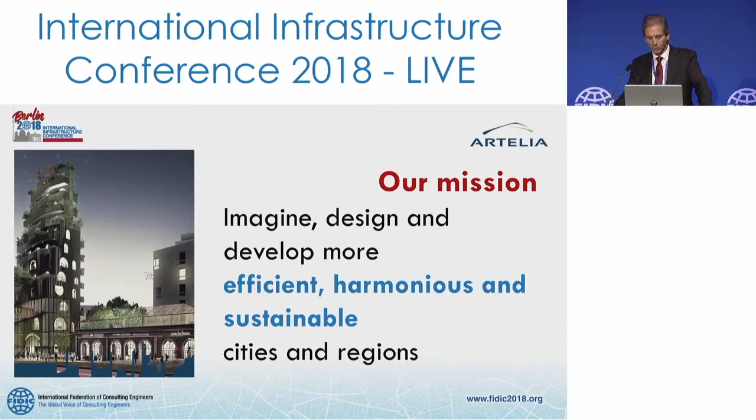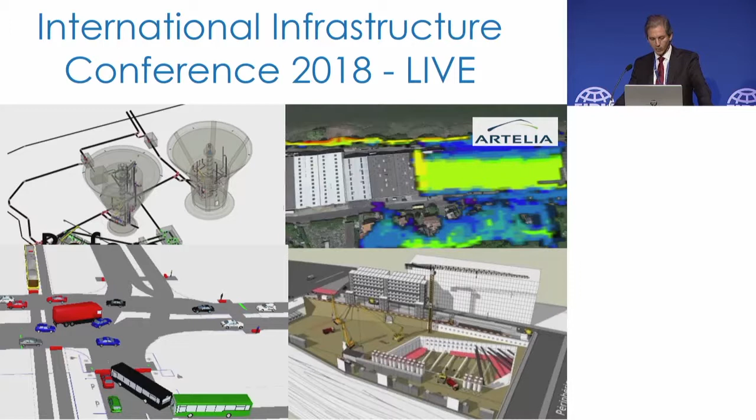And we can model very complex systems, far quicker than we ever could in the past. We can run many scenarios, because things that used to take 2-3 days to run now take a few seconds. And we can also have models that are more and more accurate, because they are fed with more and more data.

In fact, our modeling is a combination of mathematical models and the input of statistics. And we can also model at very different scales, from very small to very large.

Basically, we tried to articulate all the available data that we could gather—gather the data, put it together, bring intelligence to this data, and especially categorize it to make it easy to understand, easy to use, easy to express to elected officials. Because the ultimate goal was to help the mayor of Santiago de Chile craft a sustainable development policy for her town, as well as an action plan subsequently.

We also were able to compare that data with what we experienced, for example, in Paris. It ranges from air quality to sun exposure to accessibility and so on. What we found out is that in Santiago de Chile, the circular economy is already very much in place compared to many other cities, whereas the main issues they're facing are traffic and continuity within the city.

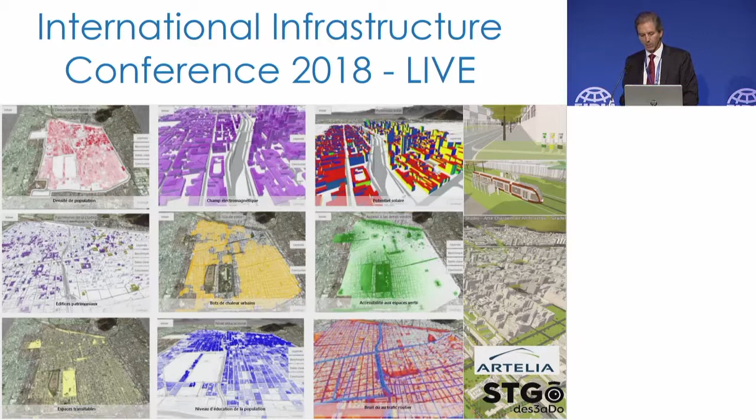And this is also why we need more than ever to invest in our people. When I say invest in our people, it's also because after the simulator in Santiago de Chile, we decided with our partners to create a cluster. It's a completely different approach—not just about the data, it's also about the people. It's about putting people together to think, to develop, to create a smarter way of working together.

So private companies as well as the municipality, we teamed up with a test municipality around the northern part of Paris. It's actually the location where the 2024 Olympic Games will be hosted, with a stadium and a swimming pool. And what we put together is all these partners - now we have 100 partners that have gathered together, and we bring our intelligence, our innovations, our disruptive ideas together.

Together to question the traditional value chain of our infrastructure, but also to test some new uses, new technologies. For example, we are working on a possible 3D pathway. We're working on anti-noise walls that could produce energy. So there are numbers of ideas like that, trying to select, decant, and categorize, so that we can develop from the experimentation, from a bottom-up approach, a sustainable development policy for that area.

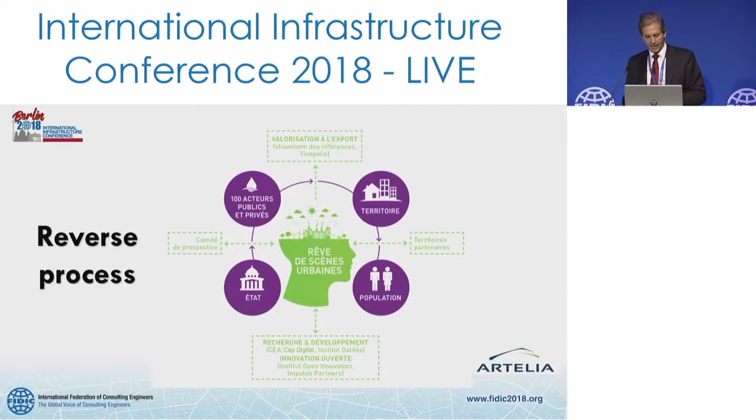And I would like to now dedicate the last few minutes of my speech to narrow down to a smaller scale, a far smaller scale, and mobility, which is one of the red lines of our conference. As a starting point, I would like to share with you - I suggest that we watch this one-minute movie that was shot by an Argentinian artist who is very much involved in looking at the transformation of cities. I suggest we watch that and then comment on it.

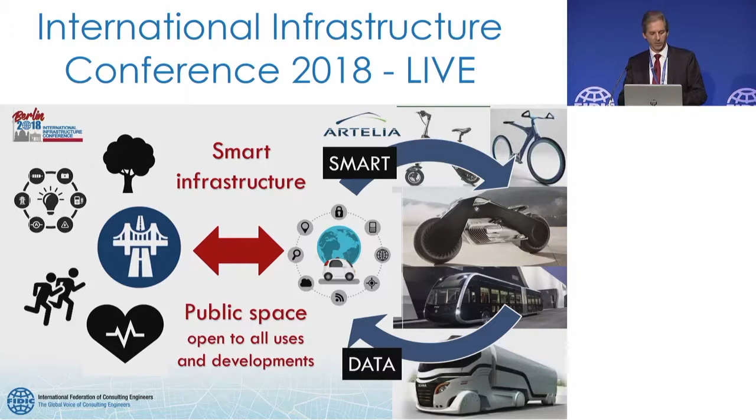But this is exactly what you have here on this slide - the smart is through the interaction between the infrastructure itself and all the vehicles that are equipped with sensors and all types of devices. But this model is also hit by some new competitors, new entrants into the system, and shaken by these new autonomous offers where the infrastructure is not really involved. It's just about the equipment, about the vehicles. And we also see this through Waze, that we all know for our vehicles.

We also experience this very similar thing in Paris, because with regards to renting bicycles, we have been overwhelmed over the past few months by new offers, by bike renters bringing GPS-equipped bicycles that you can identify and locate with your cell phone. You can rent, then drop them anywhere you want. But these systems, they are not as secure - they are far more flexible, but not as secure as the first ones. And sometimes they have some strange behaviors.

For example, we were hit by a heavy snow event last winter in Paris, and Waze was directing people to all the empty streets. But the streets were empty because there was a lot of snow, so you couldn't drive. So it shows that, of course, things are evolving and going towards more and more independent systems from the infrastructure. But we are still not completely there right now. My last thought, my last bet, is that these security issues, these legal issues, these fine-tuning issues, they will be solved one day or another.

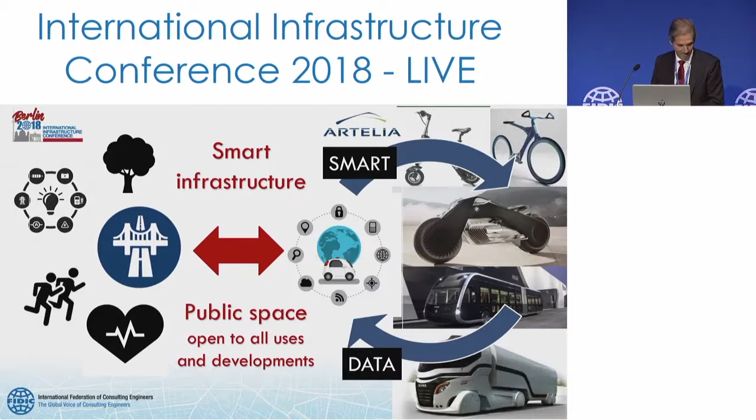Thank you. Yes, that's me.

Thank you, Gavin, for the introduction. My name is Thomas Birtel. I'm coming from Vienna, being the CEO of Strabag. And some of you who know the company might ask yourselves, are they not a contracting company, or are they an engineering company? It's true, out of our 73,000 employees, about 20,000 are engineers and technicians, but they are mainly devoted to the contracting business, to the construction business. But notwithstanding that, we do have two engineering departments: one devoted to construction and civil engineering of about 1,000 engineers, and another specialized in the road infrastructure business, also amounting to about 1,000 engineers. Hence, I feel deeply honored to be invited today. I think it's the first time my company is delivering a contribution to the FIDIC conference, and I hope I can respond to the expectations.

Stemming from the contracting business, we have two features in mind once we hold our presentations. The one is keep it simple, and the other is keep it colorful and a little bit hands-on. I'll try to do that myself, although the subject is a big one. Smart cities of tomorrow is a very wide subject, and I've just 10 to 15 minutes left to give our view on that subject. I'll try my very best.

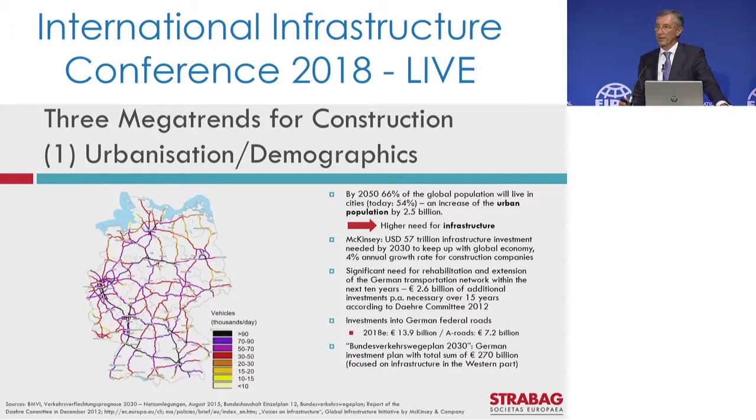In the European Union we have a climate and energy framework which sets three targets until 2030: at least 40% cuts on greenhouse gases, at least 27% share of renewable energy, and at least 27% improvement in energy efficiency, which is a huge challenge.

We have to keep in mind that it is not road traffic producing the majority of greenhouse gases in the world today—it is buildings. They account for the largest share, not only in the EU but on a global level, of final energy consumption, producing about 35% of all greenhouse gas emissions. Traffic is just 25 to 30%.

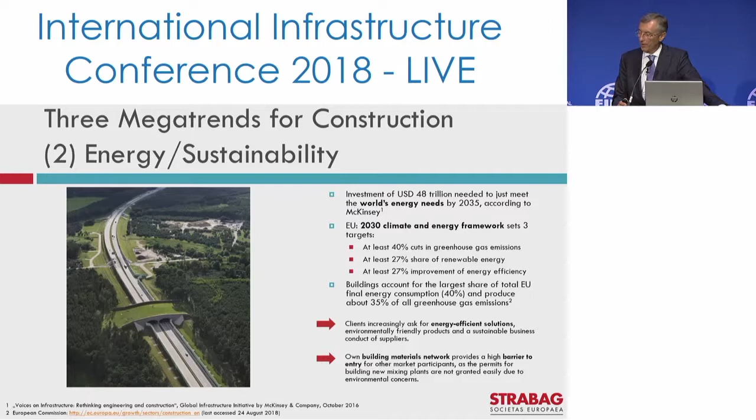This gives us, of course, business opportunities. Our clients are more and more asking for energy efficient solutions, for energy efficient buildings. And being also a raw materials group, we see that our own building materials network provides a sort of barrier to entry for new competitors, because nowadays it's very difficult, in light of the above-mentioned situation, to get new permits for new mixing plants for asphalt and concrete, or to open new gravel pits or quarries.

Third megatrend, and we have heard a lot of that today already, is digitalization. To give you a picture focused on the construction industry, in the first line we have shown the productivity gains in the construction industry, the producing industry, and the manufacturing industry for the last 10 years since 2008. Construction has a plus of 4% only, the producing industry 27%, and manufacturing industry has a 34% productivity gain.

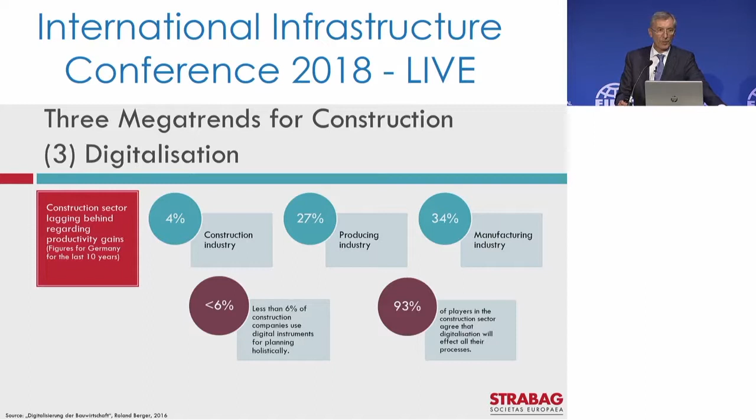The lagging behind of the construction industry is evident. The second row gives two obviously contradictory opinions in our industry regarding the importance of digitalization. Less than 6% of construction companies, at least in Germany, use digital instruments for planning holistically. Of course, many of them use a lot of tools separately, but a holistic digital approach in our industry is the exception. On the other hand, 93% of the players in our industry in this country believe that digitalization will affect all their processes, and the contradiction is obvious.

Strabag is a company with about 15 billion in annual output, very much focused on Europe. We produce more than 90% of our output in Europe, and that's why I underpinned the importance of those megatrends also in the old markets. On the other hand, we have strongholds in the Middle East, in Africa, and in Southern America, which means we are also very vigilant regarding the development of the megatrends in those parts of the world.

To fulfill my promise that I would give a hands-on presentation on the subject, I would like to give some very practical examples which we can currently show in our company. Two of them will be from our research and development department, and two of them will be construction projects. Two of them dealing with sustainability, and two of them coping with the challenges of the urbanization trend which I described before.

The first one comes from our research and development department here in Germany. Particulate matter is a big subject in this country, especially in some major cities. We are right now testing with some partners a sort of modular moss-covered noise absorption wall, which shall be capable of binding particulate matter and hence help reduce pollution via nitrogen oxides. This is something which will be running at least until the middle of 2020. The first findings are challenging, but we are continuing to work on that.

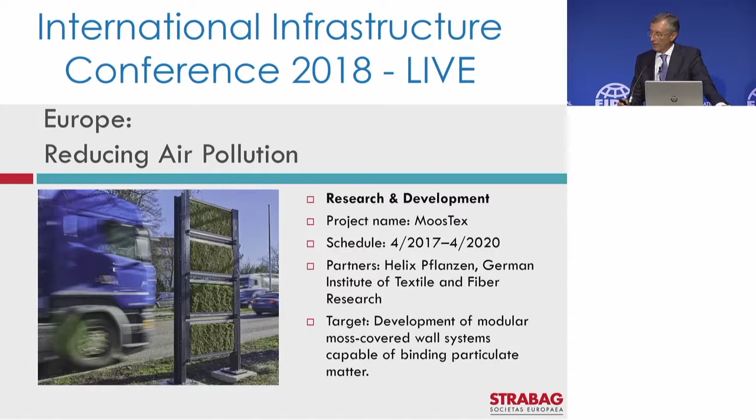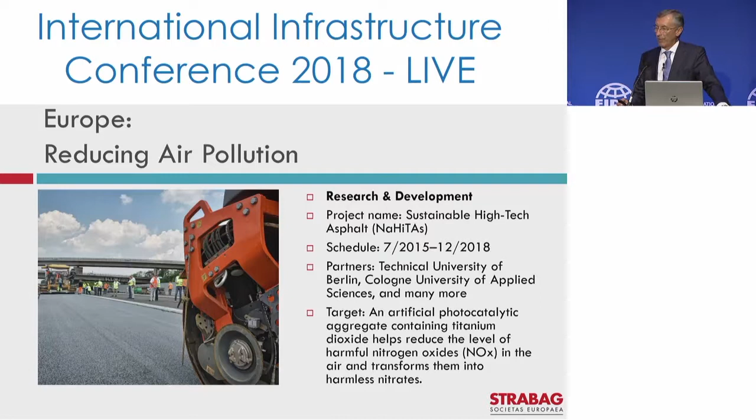The second project I wanted to present is what we call in German Nahitas, translated as sustainable high-tech asphalt, a pavement recipe for roads. We do that together with the Technical University here in Berlin and with Cologne University. The target is to develop an artificial photocatalytic aggregate serving as pavement for streets, which contains titanium dioxide and helps reduce the level of harmful nitrogen oxides in the air, transforming them into harmless nitrates - another way of reducing pollution in overcrowded cities.

The third example is a construction project. When we talk about the megatrend of urbanization and demographics, we feel we can define at least four subtrends. The major challenges urbanization entails are the establishment of an environmentally friendly, sustainable infrastructure; the establishment of efficient waste treatment systems; water distribution and wastewater collection systems; and a fourth one - it's out of my mind right now, I'll come back to that later.

This deals with the first element I mentioned. We have built a bus rapid transport system in Tanzania, in the city of Dar es Salaam, which operates buses on dedicated thoroughfares and hence increases the attractiveness of this public transport means. One problem of our current and future traffic situation is that individual transport is far privileged and above public transport in the acceptance of the population, and this is one attempt to increase the attractiveness of public transport in Dar es Salaam.

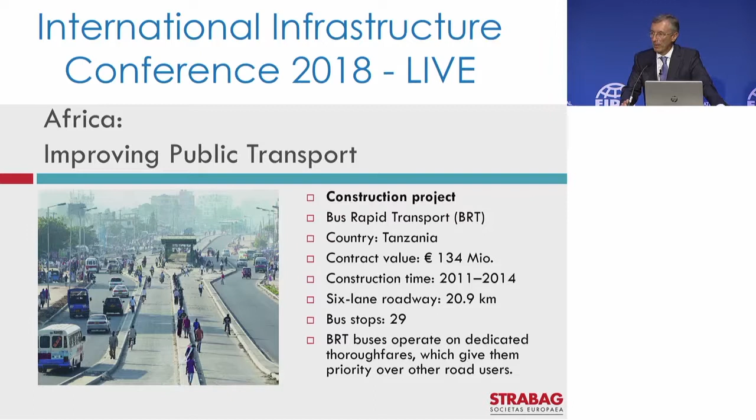The second construction project deals with the waste treatment problem I mentioned as a subtrend to urbanization. This is a new sewer network in the city of Singapore in Asia, which we built from 2015 to 2017, and it had to be built in a densely populated area. Singapore is not a new city, it's a highly populated existing city. We applied the construction method of pipe jacking, laying concrete or steel pipes non-disruptively, especially suited for installations with relatively small diameters, making it possible to establish such a new system in a highly populated city.

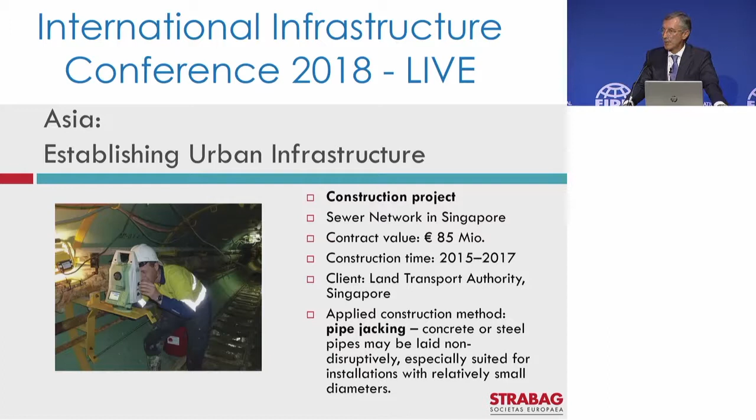So these are four very concrete examples from our practice. Some are still ongoing, others are already in the past, and I hope that gave you a practical picture of how we are tackling the challenge to contribute something to develop smart cities in the future. Thank you very much for your attention.

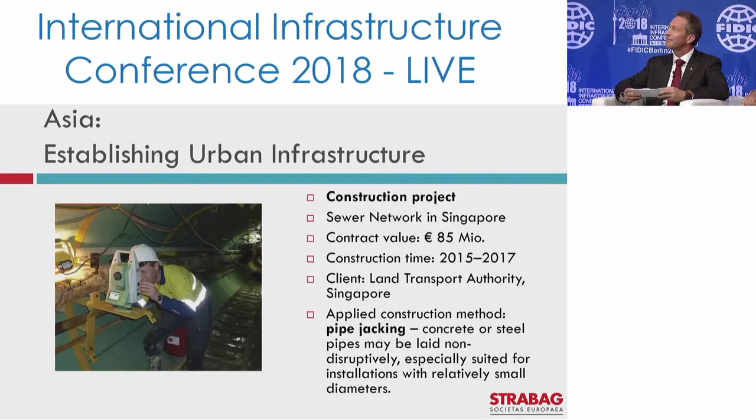Thank you for that, Thomas, spot on, well done, great timing. So Alexander Jan from Arup, he's the Director for City Economics, just appointed fairly recently. Up to Chief Economist is the latest appointment. So two economists on the platform at least, which is good.

Is it that way? Okay, good afternoon everybody, I'm delighted to be here.

Having seen the run-through of artificial intelligence and various other technologies, I wish we could apply it to dealing with some of the challenges facing Britain back at home at the moment. Perhaps they can apply it to solve you-know-what.

I'm going to run through a couple of things. I'm conscious that the next session is about financing and funding, and we've covered a lot today on mega trends like urbanisation. I want to draw out the extent to which technological phenomena affecting demand for transport, from a consumer point of view rather than the supply side inputs discussed today, might have implications for major schemes, notwithstanding the urbanisation already talked about, and the implications for investment and for how we fund and design new projects.

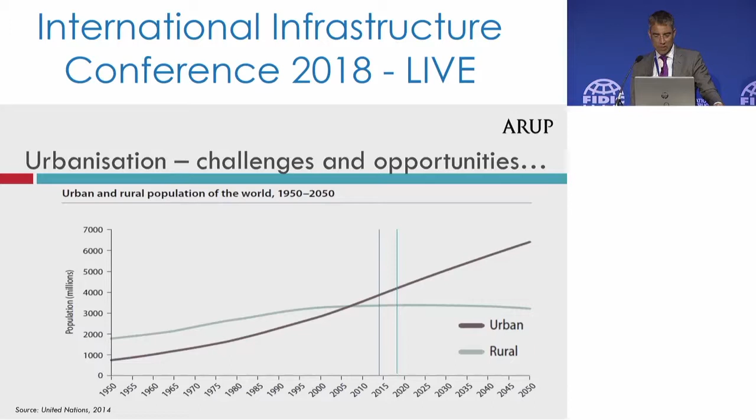These are charts from the United Nations showing the trend other speakers have already highlighted: this hurtling towards urbanisation, with so much of the population living in cities within our lifetimes. You can see, as Gavin mentioned, the importance of megacities, projected to reach 41 by 2030.

It's worth noting there's a bit of a hockey stick curve for megacities. The more densely populated and larger they are, often the more interventions they need to keep them going. The day-in, day-out stress that infrastructure experiences in these teeming cities means they need more public sector interaction and interventions to maintain the quality of services and environment they're designed to provide.

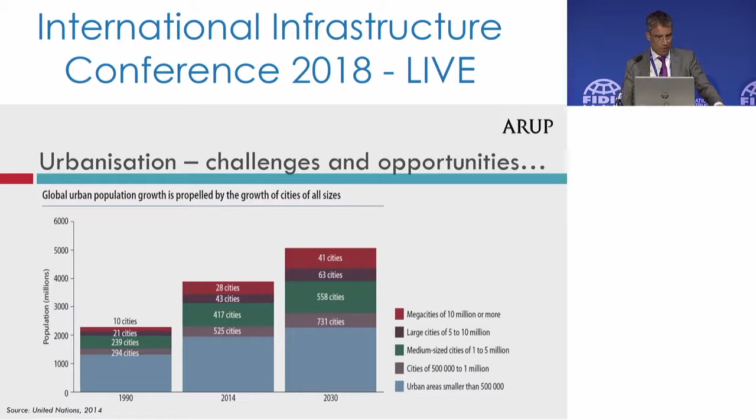If you look at what's going on with projections for cities in the Far East and East Asia, you can see enormous increases in population across the region, in Malaysia and other states.

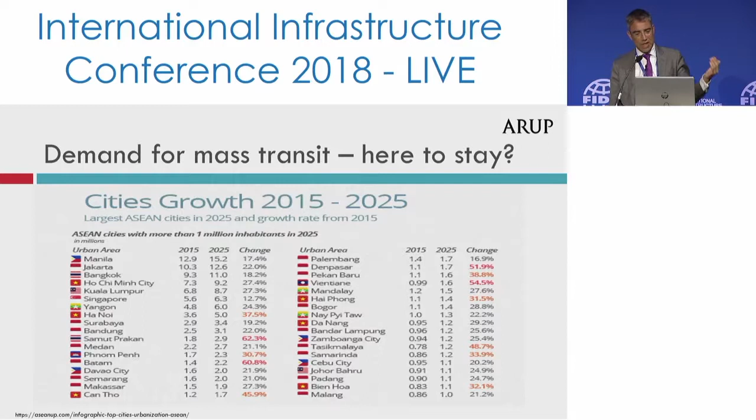In order to build them, they need capital. That capital is not necessarily scarce - we all hear about this wall of capital, with pensions apparently going to be invested in these things. But it does mean there is competition out there for the funds required to facilitate the borrowing or other mechanisms to build these schemes.

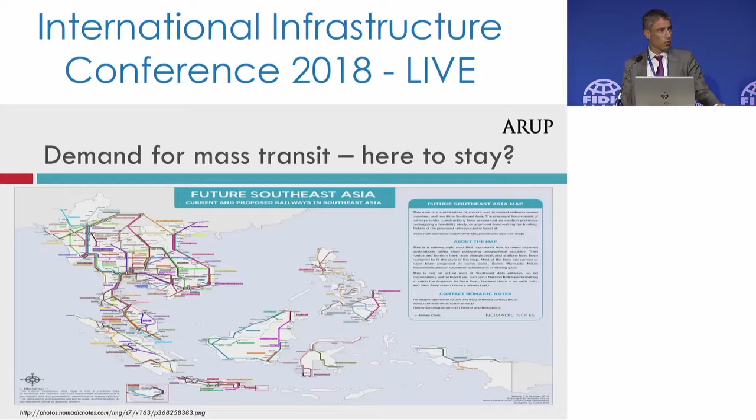And that's just in metro lines and railways. As previous speakers have identified, there's also huge demand for investment in water and waste, renewables, energy and so forth. In that context, and thinking about the technological arguments that are the key theme of today's conference, I think it's worth pausing to reflect on what's been going on in the rail market.

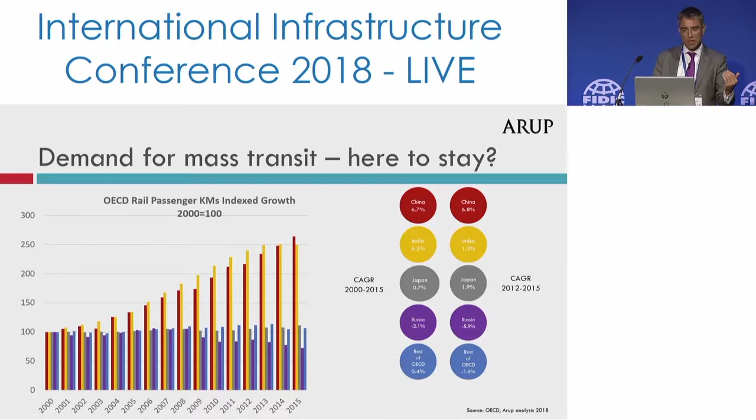This slide shows that for OECD countries, there's been a bit of a softening in rail passenger demand in certain parts of the world over the last 15 or so years. While China has continued to grow relatively strongly, other parts of the world, including Russia, the rest of the OECD, and rates of growth in Japan and elsewhere have tended to be on the low side or softening. That's reflected in the case of the United States.

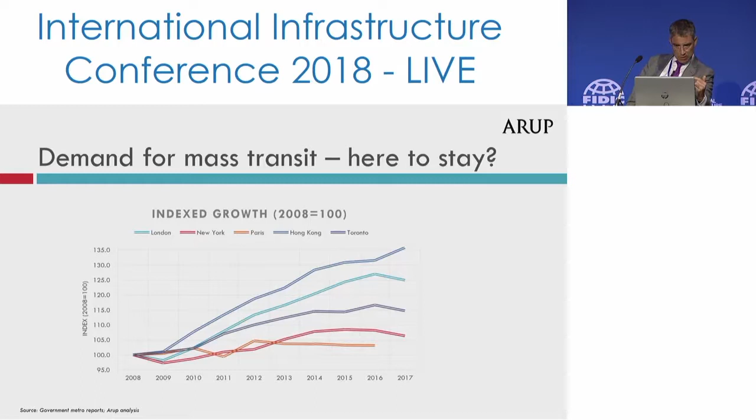This shows, with Paris at the bottom of the scale, then New York, Toronto, London, and Hong Kong, that there's some sort of change going on in the market for city-based systems, perhaps less so on the intercity side, but there is something going on. The ever-increasing use of metro systems we've experienced in the last 10 or more years appears to be softening and potentially changing.

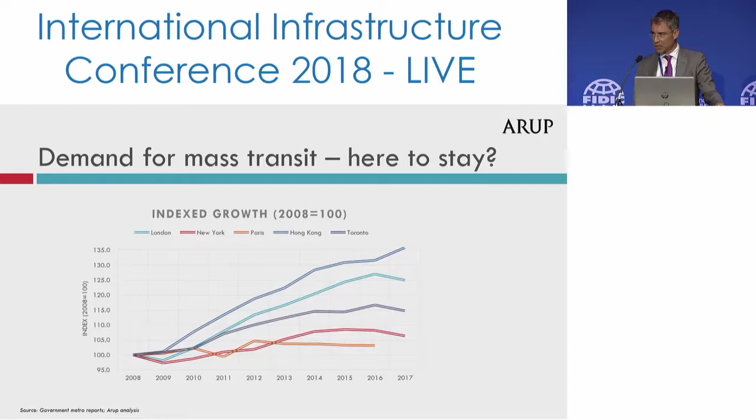We've been doing some work in the UK looking at the same phenomena. What I really wanted to show you is this green line on the right-hand side, which is the demand profile for London and South East commuters. It's a very large commuting area that's experienced considerable growth for many years. London's population, despite the headwinds and uncertainty of Brexit, is still growing by between 70 and 100,000 people a year. Employment is still strong, the economy is growing, and yet we're seeing this fall-off in commuter demand, as well as some off-peak softening.

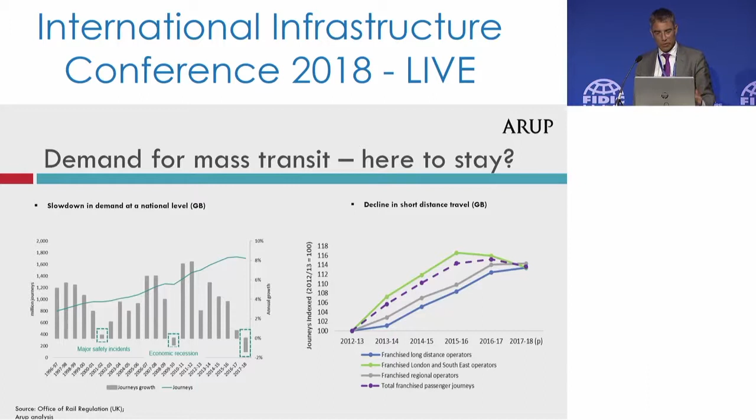I think, for lots of reasons, we need to be trying to understand these trends and the sort of responses that are going to be required.

I think what's interesting is that we can build scenarios, this is a UK context, but I think it has read across to other parts of the world, where we can try to tease out how some of these trends might well affect the level of demand for our systems going forward.

In the UK, what we've seen is an interesting effect where there seems to be a decoupling from people buying season tickets. Historically in the rail market in the UK, if you work in a full-time job in the same place, you tend to buy a ticket which gives you a year's worth of travel, priced in such a way as to make it economically sensible if you work 46, 47 weeks a year.

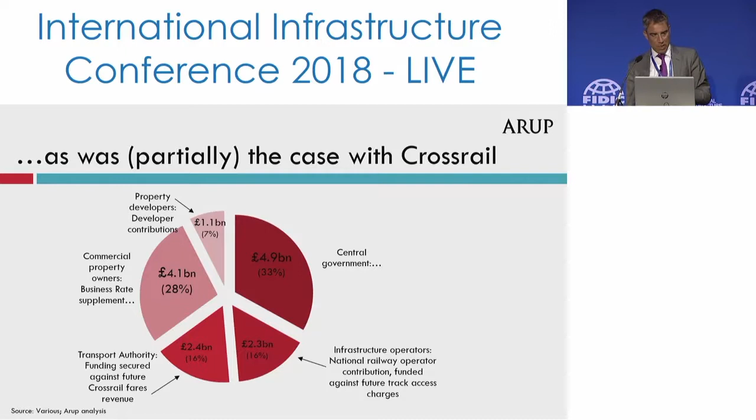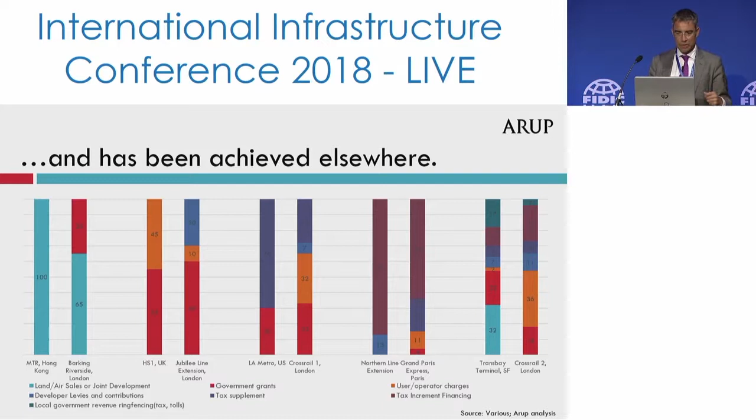So when there was a change in government and a Treasury review of Crossrail, effectively they would have got 100% of the political downside, but only a third of the money back. So I think we should think about how we pay for these projects, who's paying for them, who's benefiting from them, and how that plays out in terms of the deliverability of those projects, their acceptability, and these coalitions between business, this sector, government, developers, and so forth.

To conclude, I think we all agree that urbanisation presents lots of opportunities. We've got these disruptive factors - I think many of them are exciting, and I think we have to embrace them. I don't think they are going to fundamentally change the case for delivering schemes which transform the way our cities work. Transport is about creating livable, attractive cities. It's very hard to see a world within which metros don't play a core role in that.

But it may force us to look again differently, to extend our thoughts about innovation to funding as well as to other things. That in turn will have impact on governance and the coalitions we build in order to deliver the metros of the future. Thank you very much.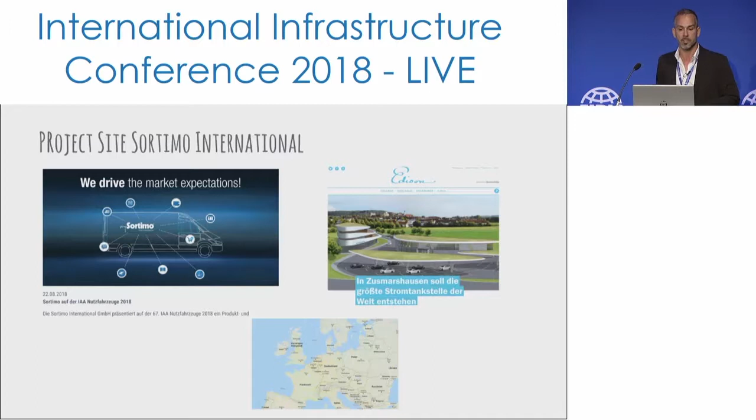I want to introduce to you first the company, the private company paying for this project, who is investing 20 to 25 million euros for this project. I believe you don't know this company. The company's name is Sortimo. Maybe you've never heard of it here in this room, but this company is a big player. It's a big player in performing logistics. It's an enabler for logistics.

Their clients are people who do logistics and mobility, and they have to fulfill their clients' needs. How will logistics, how will mobility work in future, and how can we assist our clients? I guess, as most of the participants here will believe, that our mobility will change to electrification.

This company started about two years ago with us, thinking about how we not only have to change our cars or the interior in our cars for our logistic behavior, but how we should also change the infrastructure behind it, and also the infrastructure for the energy that needs to support this new type of mobility.

And therefore we started this project, and somehow, it was not the plan, we made it into the world's largest EV charging station, and this in a country where the change from combustion to electric vehicle is a very slow growing business. So this company needed to fulfill its clients' needs to think in a totally different way.

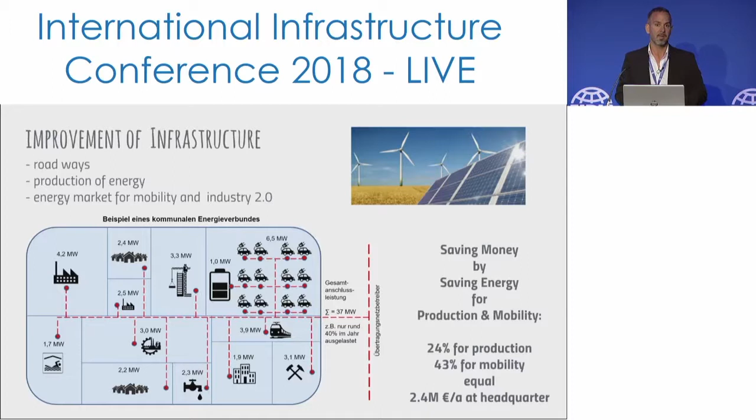So let's look further around the area of the small village. Compared to other countries or sites you may be coming from, it's not a very large area and maybe not even a lot of cars - we're talking about less than 200,000 cars. But these cars in this area travel 2.6 billion kilometers per year.

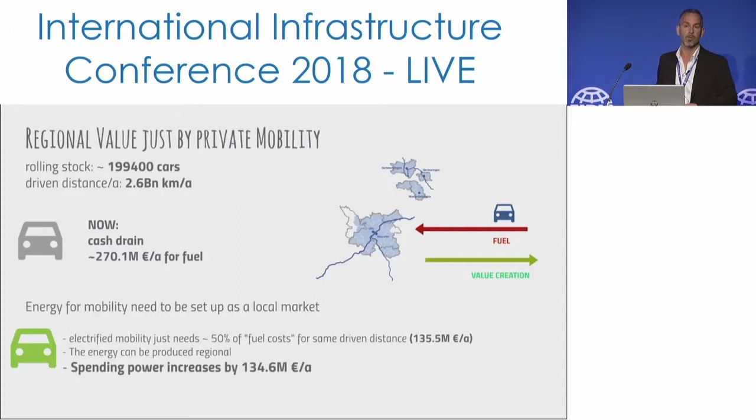This means this area has a cash drain for mobility power of 270 million euros per year for fuel. Due to electrification and new infrastructure and energy distribution, we can improve this - we have more profit. The same mobility can be achieved electrified at about 50% of the cost. So finally, around 134 to 135 million euros per year become available as increased spending power in this area.

That's a large number, and these numbers attract other core players. People who think online work and tick totally differently from people who work offline. Now we have a change in this area where we're bringing online processes to offline situations, to offline infrastructure. How will this project look?

This is the largest EV charging station - I'm not sure if it still is. It was the largest one about 3 months ago. Maybe somewhere in the world a larger one is now in planning or construction, we don't know. But the very important point is that the entire energy is coming regionally.

It's renewable and needs to fulfill this added value aim within this area. So that's how the site is looking like.

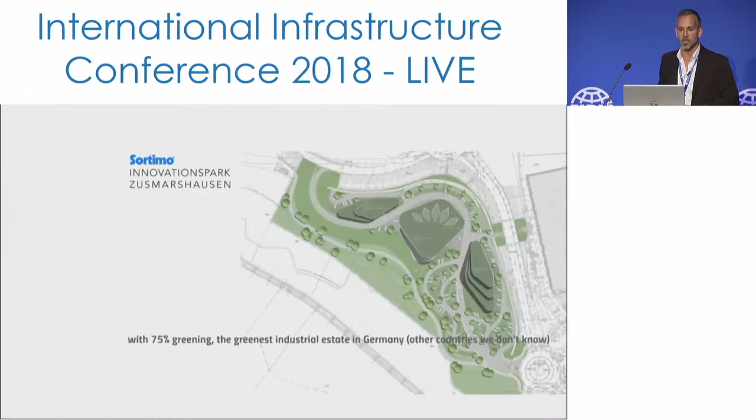The construction work started in February this year. Right now, we are in the middle of progress, and we want to finalize this project by mid of next year, because infrastructure is also slow in constructing. We also have to take in mind that we don't only have a disruptive change, but we also need time to construct it. So what we set up, these are all new possibilities coming with this new green mobility, this green energy we have. It's also possible to set up an entire new structure planning.

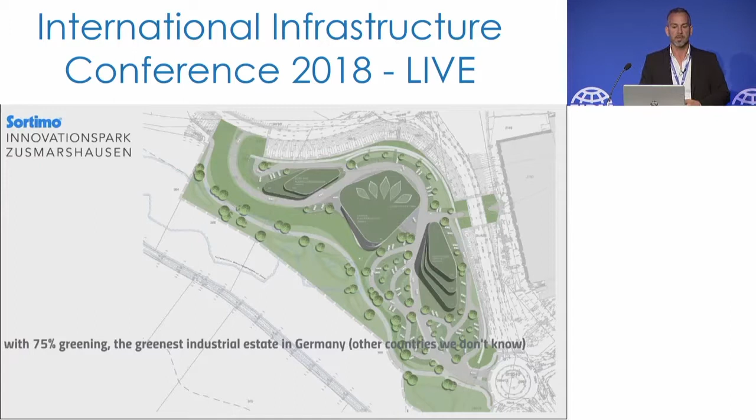As far as we know, it's the greenest industrial estate, 40,000 square meters in Germany. The authorities behind were very open-minded related to this project. In Germany, we have had the legal permission for this project within less than 6 months. That's very quick for Germany.

We also implemented new approaches in pollution control. In Germany, for example, very important is noise abatement. You're not allowed to develop areas if you don't fulfill noise abatement or have limitations already in these areas. But due to the change in electrified mobility, we have had new possibilities to rise up new ideas in planning.

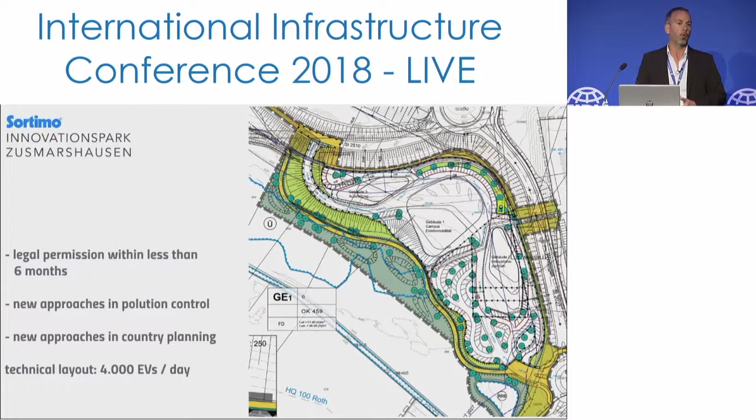The technical layout for this charging station is 4,000 vehicles per day. Already Sortimo has a need of about 400 cars to charge per day, just as a side information. Within the first stage, we're constructing the entire site.

We will set up a new campus electromobility. We set up suprachargers with charging power larger than 450 kilowatt, and we have over 160 DC parking lots up to 120 kilowatt.

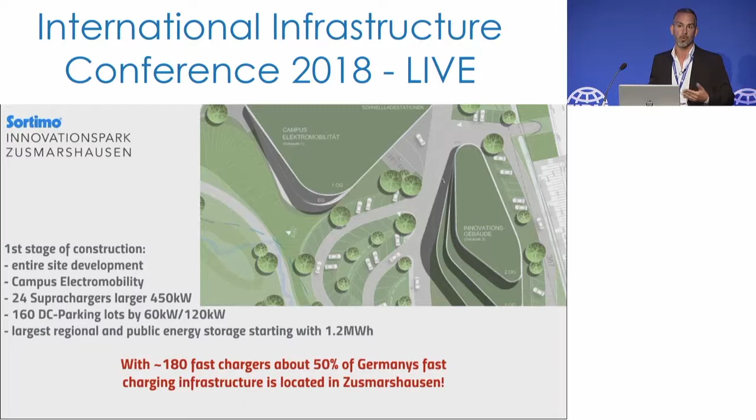Why this high amount of energy? Because we know from the car makers here in Germany, but also from Asia and other countries, where the way will head. So we will need these fast chargers to set up a distribution channel for energy, to earn money with this renewable available energy.

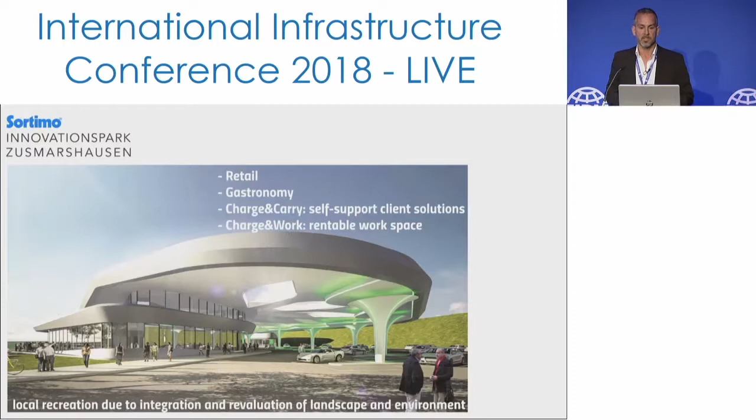And the new key players, where are they? That's retail, that's gastronomy, that's mobility, that's infrastructure, and also logistics. So this all is placed together within this campus building.

So one key player here, for example, is a large retail company. We have to set up new products and services for our clients. So that's just an overview to deliver a one-stop solution for the demands of mobility and infrastructure in the future.

Due to time, I just want to give you the information: new markets also for engineers will arise in relation between infrastructure, retail, and logistics. We believe this will be a great market of the future. I'm not afraid of it, but we all need to be flexible and open for these new changes in engineering. Thanks for your attention.

That's excellent, Frank. Thank you. Superb. So, Greg, how long have we got left? 10 minutes? Okay, 10 minutes. We're running a bit behind, but we started a bit behind as well, so Greg's very kindly given us 10 minutes for questions. Perhaps I can start the questions just whilst people are thinking about what they want to ask.

Alexander, I'm going to start with you because I was quite interested in the financing aspects of funding cities of the future and how we get over this. You talked quite a lot about mass transit, but I think it was the financial aspects. What do you see as the key funding? You mentioned land value capture, but what are the financing mechanisms that you think can help us fund this going forward? Because it's going to be an enormous demand.